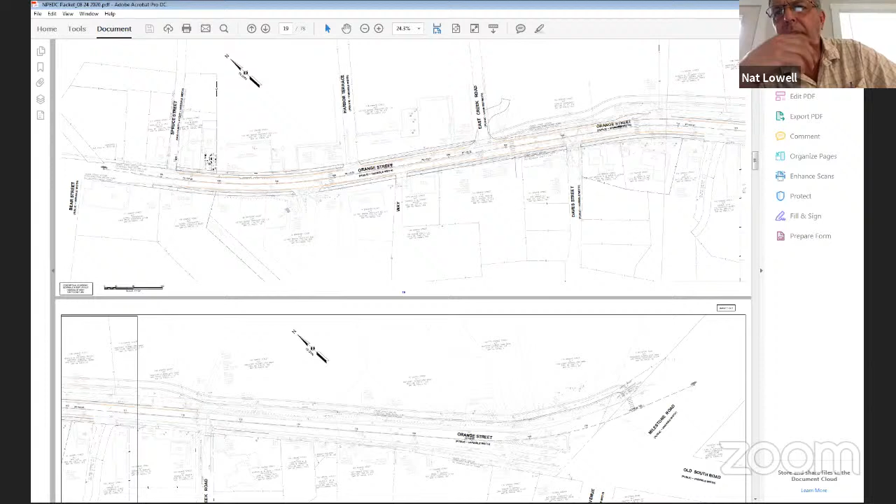I can't see anyone's hands right now, so does anyone have anything? Just speak up first. There we go, thank you Honor. Does anyone have any questions? I certainly have a couple, but I don't want to jump right in until someone else has any questions.

Mr. Chair? Yes, John, go ahead. I know a lot of thought and planning had gone into this, and I'm maybe a little late with an idea, but everything is tight there with the bike path, telephone poles, and Marine Home Center connections. Right now we have a sidewalk on one side, and most of the problems seem to be arising on the Marine Home Center side. I just wonder, was there thought to eliminating the sidewalk and pavement on the other side, we'll call it the Henry's Jr. side?

By eliminating the sidewalks down there and adding that space to the Marine Home Center side, that's really where we want that sidewalk to be, so we wouldn't be fitting two sidewalks on both sides of the street, but consolidating, using the extra space gained on the Henry's Jr. gas station side and allotting it toward the Marine side, so it connects to Goose Pond and all the way down. I just didn't know if that was a consideration.

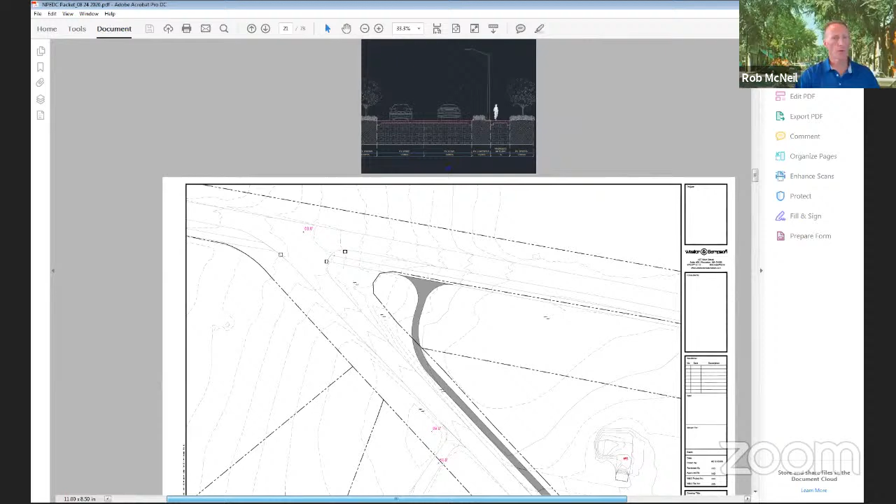So Tom Nevers bike path has certainly been on the agenda for some time for capital projects discussion. There's been a renewed interest in the past couple of years from the folks in Tom Nevers to really help prioritize this plan or this concept.

So we started working together with the most recent improvements along Milestone Road that are reflected in this, where the path actually goes up and meets the existing path. And that might still be adjusted.

There's some talk of doing sort of a rest area similar to the dedicated spot on Polpis Road, the one little bike path rest area that's dedicated to Mr. Young. Starting to develop more of those around town.

Some in this location here, seems like a helpful one, as well as down at the Milestone Rotary, sort of where all the bikes seem to come together before they disperse.

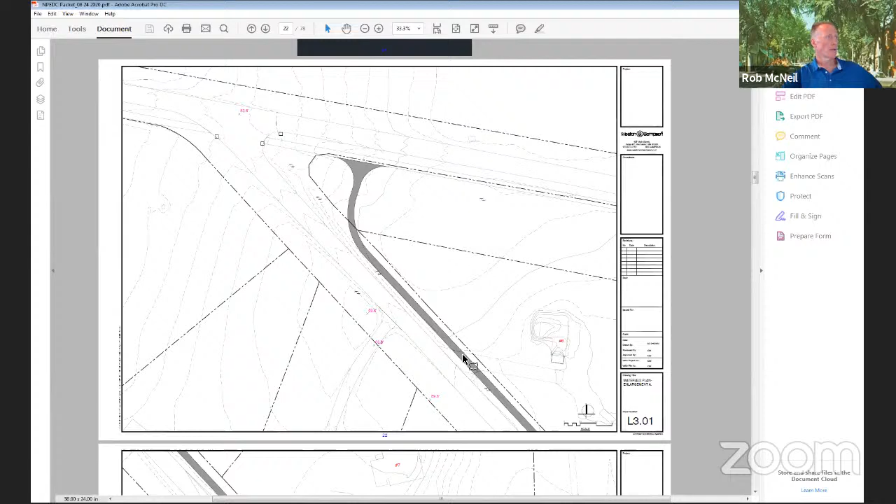So the path itself would essentially travel down the east side of the right-of-way, and that was chosen mostly because of the limited amount of driveway crossings and intersections. We're still working through some of the details with our consultant, but again, we're at still a very conceptual stage.

And this would tie down at the Tom Nevers Field into whatever configuration ultimately gets approved by the select board for future redevelopment of that.

And if folks are looking to find out what that might look like down at Tom Nevers Field, under the projects and developments on the town's website, there's the most recently published Parks and Rec master plan that was completed last fall and presented to the Parks and Rec Commission.

They have made a recommendation to the select board to move forward with the recommendations held in that plan, but that's yet to be presented to the select board due to COVID-19. So I hope that will move forward this coming fall.

In the meantime, we are advancing the concept here so that we can bring that to the Tom Nevers folks and ultimately back to select board for endorsement.

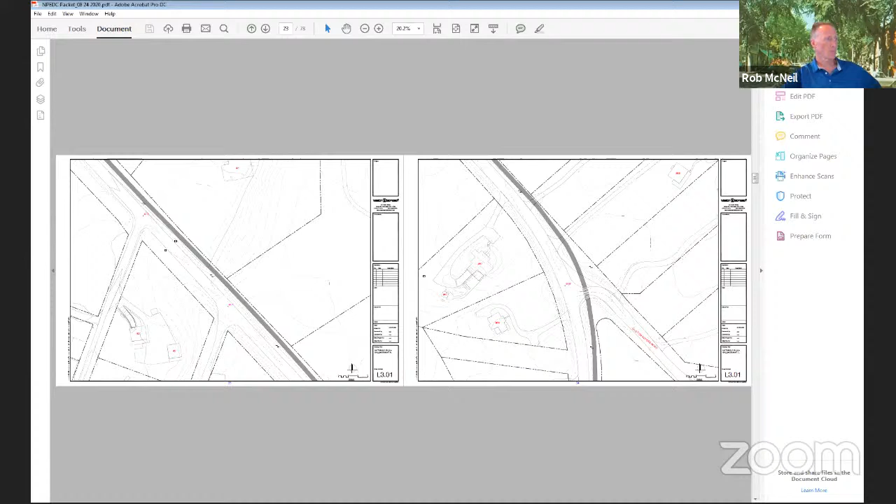Anyone have any questions for Rob or Andrew?

Just a comment to Rob. Bert Johnson. I've been president of the Property Owners Association out there for about 25 or 30 years now.

And the original developer showed a bike path on that east side of Tom Nevers Road. And he was supposed to have deeded that to the town, but the planning board at that time let him go and didn't realize that he hadn't given it to him. So we never got it.

But I've been trying to keep people from putting tennis courts and other things in the way of where that bike path was supposed to go. You should have a pretty easy trip down through there on that east side of the road.

Well, thank you for that. One of the things that we're also considering, I think that the commission should understand, is that there's a difference between designing and then maintaining and operating.

And as part of what I've inherited with the bike paths, just under 35 miles around the island, there's a combination of things going on here that sort of come into play when we contemplate the new ones.

And that mostly entails getting property right to make sure that we have adequate sight distance at intersections, and we have the right to go and maintain those sight triangles, so we can cut the vegetation back and make sure that the crossings are appropriate for bicycle and vehicular and pedestrian safety.

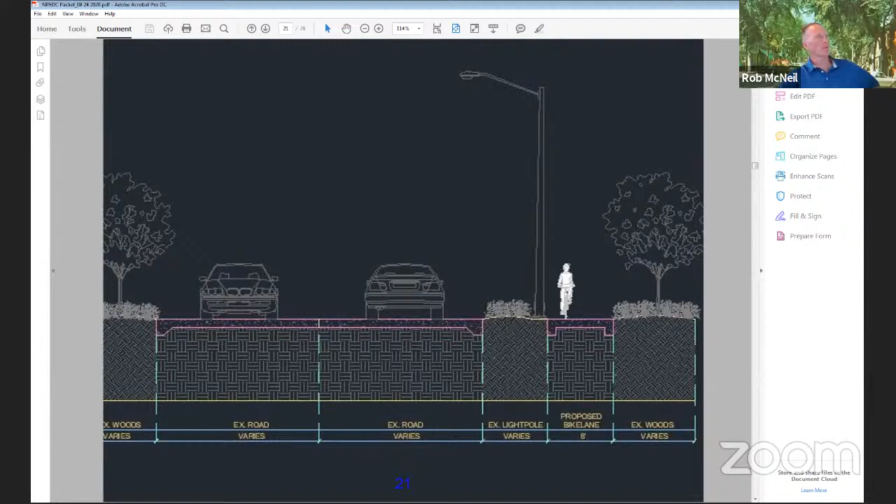Mr. Chair, the next project here we're conceptualizing is Sparks Avenue, Pleasant Street, and Williams Lane. Eleanor, you could probably go right down to the proposed work starting on, let's see, page 40. Okay.

So this basically builds off of the Four Corners concept roundabout. That's what you see pictured on the west side of the plan on the left. And so our designers have tied right into that. So Williams Lane, and this is still very conceptual, but Williams Lane, the intent of that update or upgrade will be to carry a sidewalk from the north side of Sparks Avenue all the way down to Pleasant Street. Sparks itself will have a multi-use path running along the entire south side, essentially.

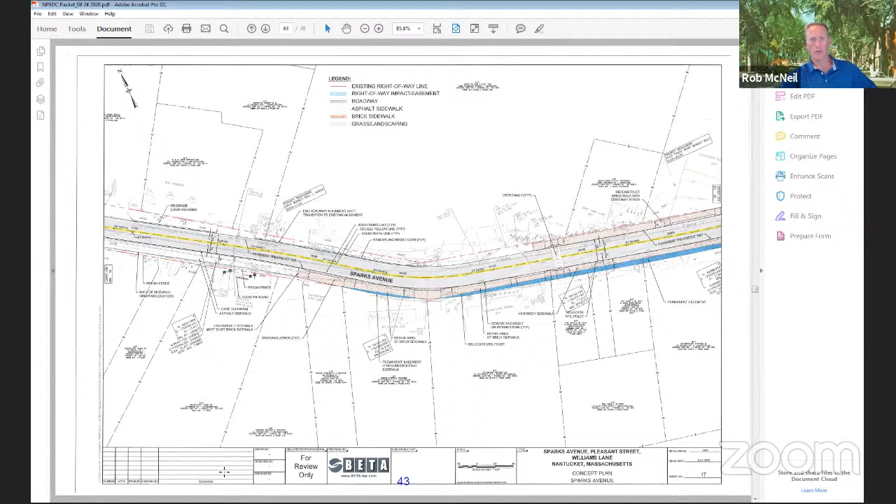Next slide. So continuing down Sparks, we would tie into essentially the existing sidewalk along the gas station across the front of the Cumberland Farms, and then continue on past the Stop and Shop. There's existing sidewalk there now. The south side would be widened to the 10 feet multi-use path and keep going.

And then we get down to the Sparks Roundabout. I want to do some things there, including a crosswalk to allow for loading, for the Downy Flake. Similar to downtown, some area for trucks that are providing services to area businesses to be able to load and unload. During busy traffic times, Sparks gets backed up with trucks just not having space to be able to go off the roadway into some of the area businesses. So where we can and where it's strategic to do so, we're taking a look at doing that.

Also, the sidewalk that currently comes around at the roundabout itself is quite narrow. You've probably seen a lot of people on bicycles using the sidewalks through this area. We've gotten lots of feedback from people using the crosswalks, telling us stories of getting stuck between the lanes, people not stopping for them, and the like. So one thing we're going to focus on through the roundabout is to really revisit these crosswalks. It's quite likely that we would be looking at doing raised crosswalks, both to continue to slow the traffic, to have people be forced to recognize and allow the bikes and pedestrians to utilize those crossings, and tie into just the whole idea of slowing the traffic so that it is able to cycle through and handle that volume.

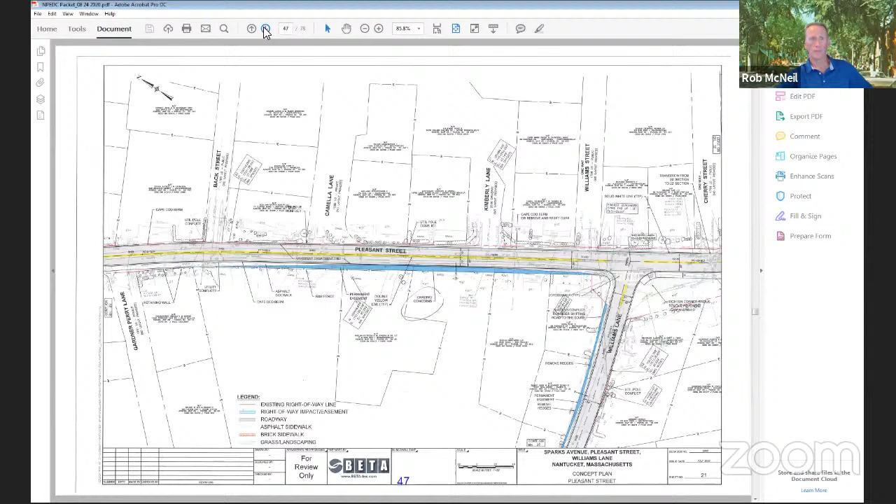As we've seen on some previous sheets, the blue highlighted areas show potential right-of-way impacts. This Pleasant Street proposal has 2 lanes of vehicular traffic, and shows a sidewalk on one side, the south side only, tying in with the proposed Williams Lane sidewalk that comes down. We'd be looking at flattening the curve, essentially teeing up the intersection at Williams at Pleasant, to continue the sidewalk and shorten up the crosswalk there to continue the pedestrian movements towards the center of town, to Mid-Island. Next sheet, please.

Continuing up, we start getting into some of the other cross streets and the backside of the Boys and Girls Club, taking a look at potential impacts depending on which way we can move. We have some pinch points, some physical in nature, like utility poles, and others environmental resources along Freedom Square. In the pharmacy area we have some wetlands. We have a number of other things to consider during this process, mostly subsurface utilities, so we'll look at any necessary upgrades to our existing water, sewer, and drainage. We also reach out to all of our private utilities, so communications and electric will be taking a look at these at the same time. Next sheet, please.

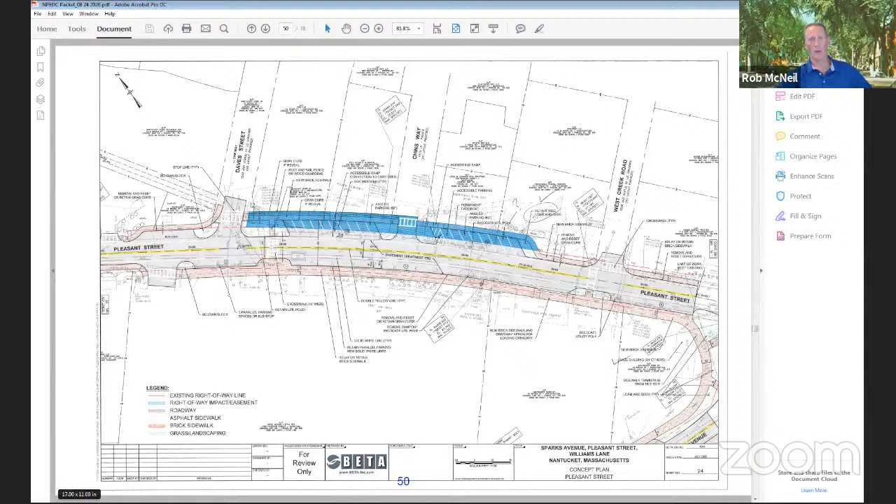That's based on a lot of excellent feedback from people who have helped me understand what goes on operationally in some of these really sensitive areas that tend to be impacted by traffic, particularly in the summer. Those lessons learned come from users going through here and seeing the different challenges, as well as public safety weighing in. We get a lot of good feedback through the traffic safety work group, as well as people from this commission and many others out in the public. There's just one simple fix to allow the free flow of traffic through here in the summer and minimize impacts based on some of these limitations that exist today.

Next sheet, please. This is just a highlight showing all of Williams. We're still looking at some of the potential impacts along Williams for us to be able to put in even the minimal width sidewalk. Next sheet.

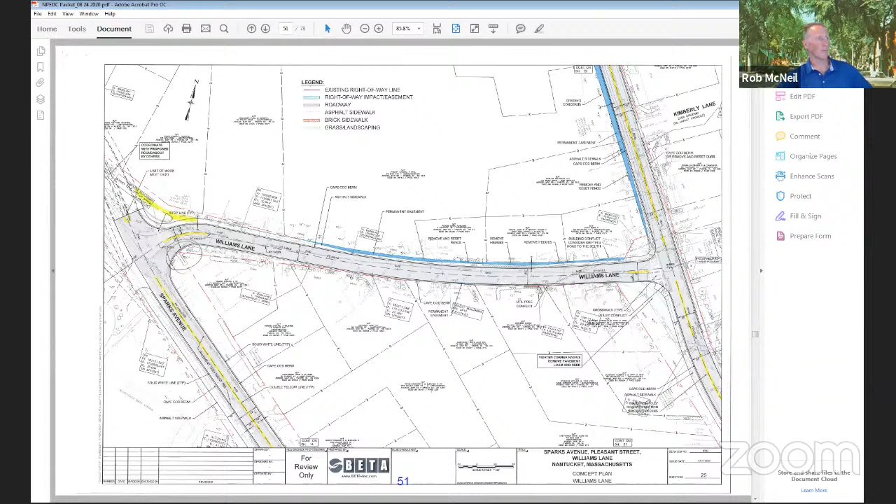Does anyone have anything for Rob real quick? These are all just concepts, everyone, just reminded of that. I'm just appreciative, Mr. Chairman, that Rob's come in to show us all this stuff. Exactly, I feel the same way.

Rob, I just have a quick point on that angle parking idea that's been bandied around for a while. I'd suggest Chins to West Creek is the easier spot, especially with that dead space by Lucky's or whatever we'll be calling it next. It's just cigarette butts and trash in there. From there to Chins, I don't know how many spaces you can get, but I'd bet 15 to 20.

Chicken Box owns that parking lot over there, as you know, especially now with COVID. Everybody in the world knows that they own it now, which they probably didn't know until COVID. I just don't know what the layout is in there. How far in do we go from the curb or edge of the Chicken Box lot to Pleasant Street? Do you know? Well, Andrew, go ahead.

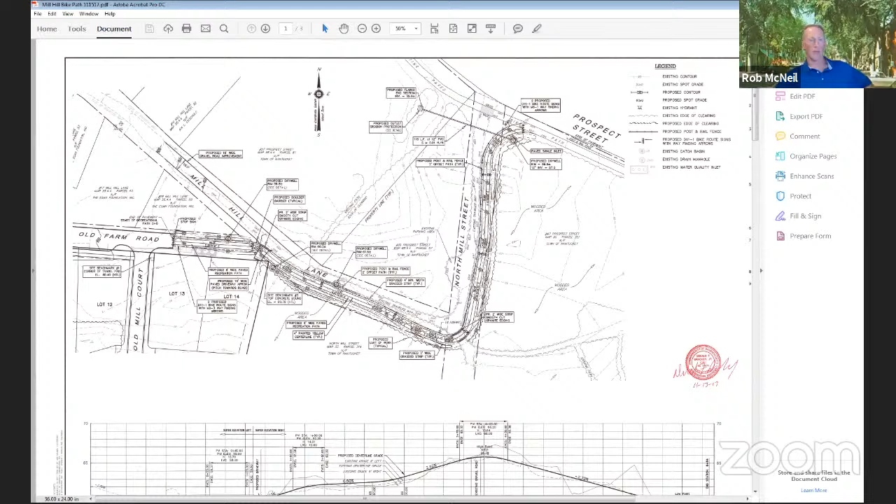We weren't comfortable putting anything forward these days that's not at least the minimum multi-use path width. This is off the surface, so the unpaved roadway is outside of that, except where it crosses at the intersection of Mill Hill Lane and North Mill, with a fence in between.

The only other thing I would suggest is the topography, which route is the least steep, whether it's phase 1 or option 1, option 2, or this one, which we'll call option 3 at the moment. That was another issue that's come up over the years.

Rob, way before you were here, when that multi-use path was put in and stopped at Stojack's property, there was a lot of negativity, path to nowhere comments in the paper. Well, that's because there was nowhere else to go, and if we didn't do it, we wouldn't have anything to this day at all. This is the worst spot on the island to figure out, worse than Orange Street, I can tell you that.

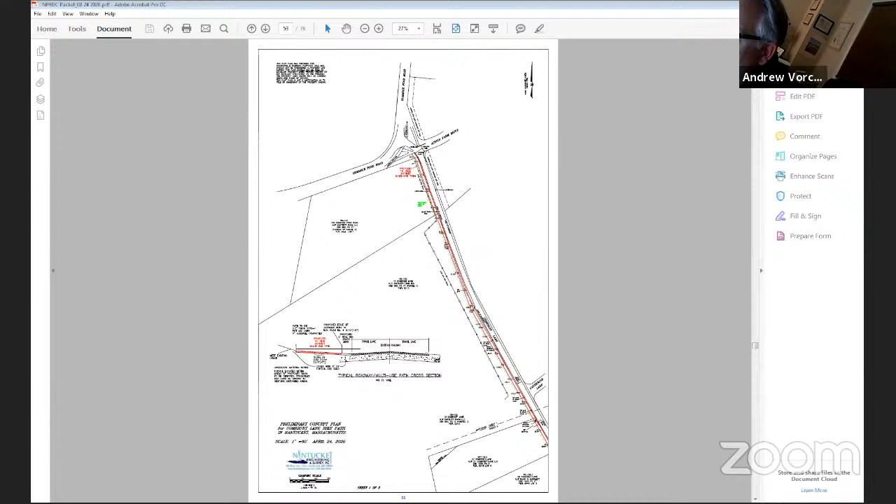So that's one issue. Eleanor, could we go to the next sheet, please? There was concern about some important trees along here, these white oak trees that are somewhat close to the edge of the road, and the idea is to move the path behind them and stay away from their particular canopy.

One thing that Rob and I have discussed is where the bike path and the road are really close to each other, it's hard to get a decent grass shoulder or have anything growing in there. So where the path is only 2 feet off the road, we're unlikely to have a grass shoulder, so it's going to have to be some different kind of treatment along there. Since we had some general support from all of the neighbors, I think we'd probably like to see if we could move it inboard a little into the properties. It would be within the front yard setback, so it's not impacting buildable area. That's where value comes in. And we've heard that there's quite a bit of support along here.

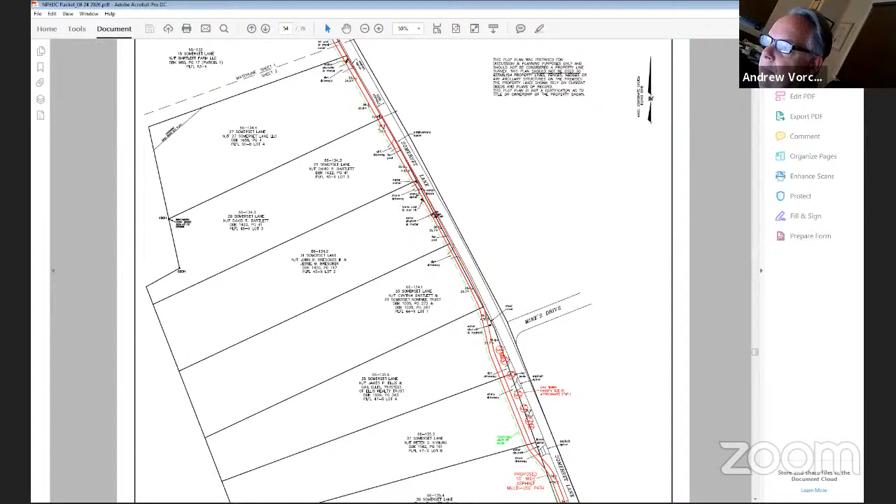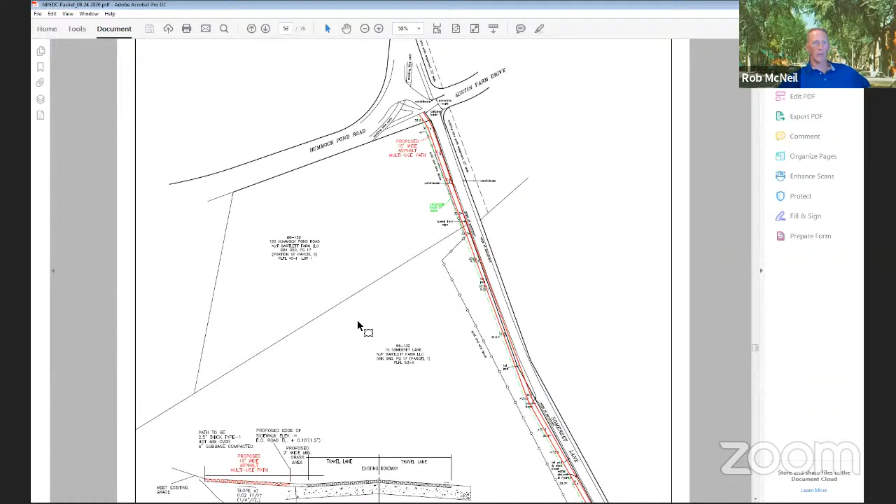Rob, anything you want to add on this one? Just that the commission should know that this is sort of a conceptual extension of what we're currently pursuing, and had worked with Mike before he left on, which is the Raceway to Somerset improvements, basically taking the bite off of the corner at Bartlett and Raceway. At the same time, keeping the Bartlett path to the south side of Raceway, so swapping sides, carrying it up to the Somerset intersection, and ultimately continuing it on the west side all the way up to Hummock Pond. So this is sort of an extension of that, and I applaud Andrew working with the person that was interested in supporting this. It's coming together, I think, pretty well. The design for the southern portion connecting to Bartlett Road is near complete, and hopefully this section here will be able to build on what we've been able to accomplish so far.

Hey Eleanor, how do I raise my hand? Oh, there he is. There you go, Bill. That's it, we can hear you. Exactly. I would like to, Mr. Chair, I would like to just add on to what Andrew said.

I would like to reinforce the support issue. All of the property owners along, I guess that would be the southwest side of Somerset Lane, are enthusiastically supportive of this, including the Bartlett family. The issue that we have with the restriction is a conversation that Emily Molden is having with the Bartletts right now to see if there's some type of workaround. But there's another side to that. My counsel feels that it's within the ability of the Land Council Board to grant this for public benefit and so on and so forth. But the board, I think, is very cautious about amending any existing restriction. So they're carefully navigating their way through, and I anticipate, or really hope, that we have a good outcome here. And in the event that we don't, maybe the town needs to consider some type of a taking.

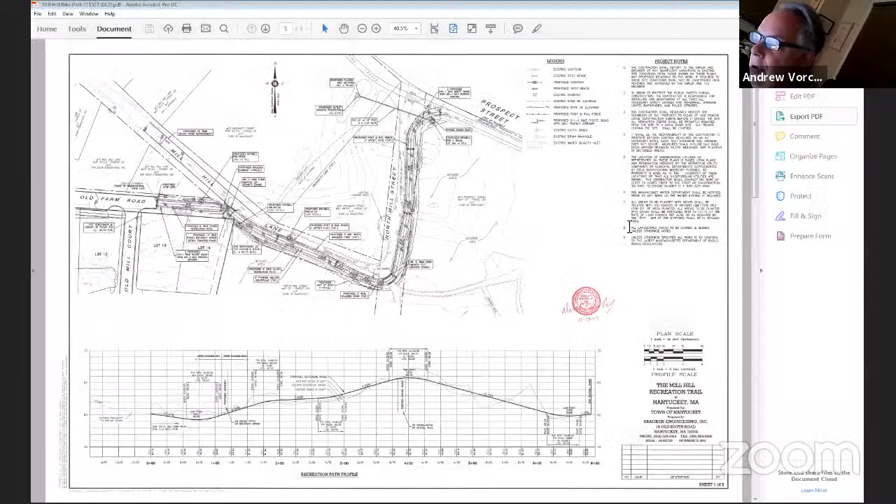I think, Andrew, this came up before Rob was here. It got closed off. I don't believe this is an actual laid-out road - I think it was one of those things that just sort of happened over the years. Jack, I don't think it's an actual road, is it? No, people traveled with vehicles for years. Yeah, I know, my father used to go up to Ernie's house that way too. It is a private road, not a public road. So that is a private road, Andrew, on the GIS or whatever - it is recorded. That came up when the planning board was looking at the subdivision next door, Old Farm Road. That's why we made that allowance for the bike path to go through.

The bike path could continue down Mill Hill, or within that Mill Hill layout. All of Mill Hill is also a private road, so we would have to do a taking through there to go down.

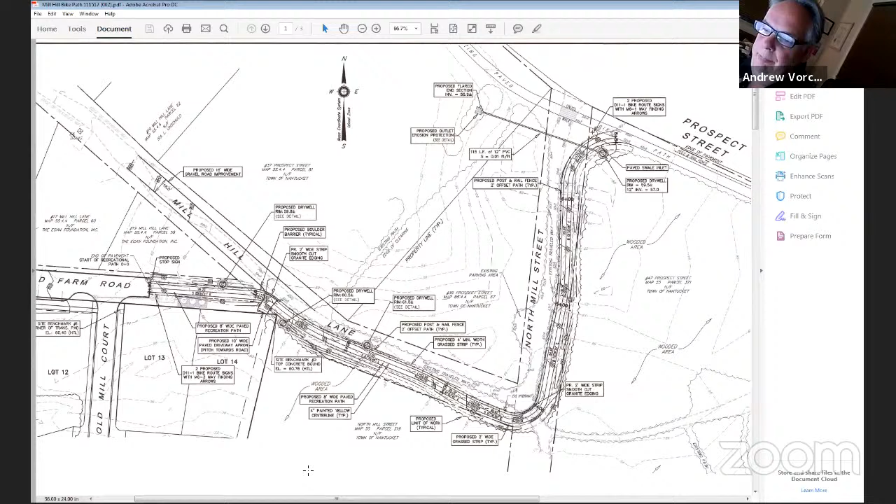I know Mike looked at it. I think it's a little bit steeper down there, very steep, and there's a lot of water that runs down the shell side and washes out into Prospect Street. Incredible amount of water runs down there, Jack, when it rains hard. That's what I meant.

All right, I didn't mean to open up a can of worms, Billy. That's all right. There's also a cut through on Cato that goes right up to Chicken Hill. I think that's been abandoned, and part of the agreement was to never open that up, Andrew, wasn't it? Part of this?

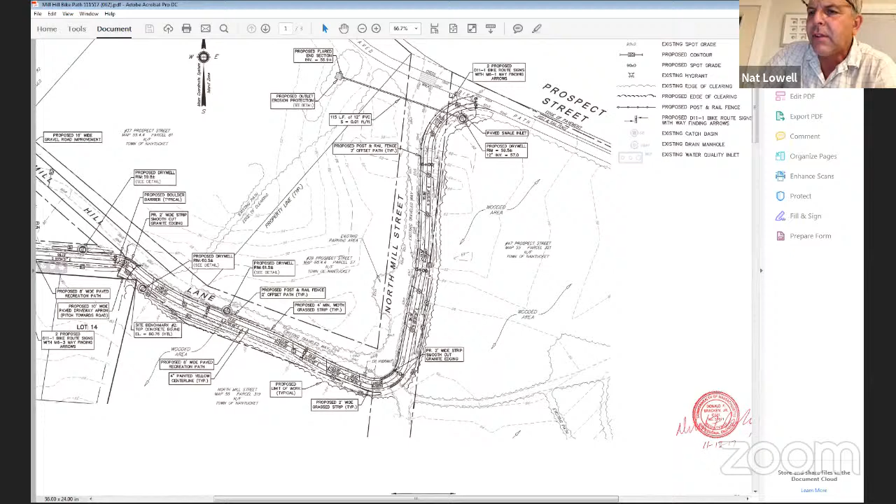Cato, he's talking about that section of Cato that went up behind. Yeah, I ride through there, there's a path. That's all private roads, the sewer line runs under there. It's not open for vehicles, but it's open. You can bike through there and walk.

There you go, Andrew, or Eleanor, or whoever did that. The one I'm talking about runs parallel, kind of along the left-hand side of the Woodland Hills subdivision.

But I mean, well, it doesn't matter, it's not viable. No, I think so we don't... Billy got us back to the previous discussion.

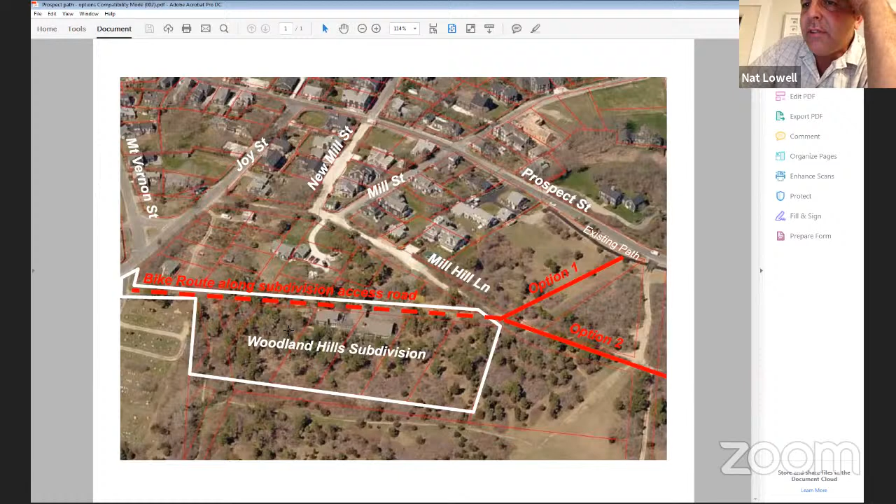Prospect Street, the dangerous part of Prospect Street needs to be improved no matter what we ever do with this nightmare here, because every bicycle is not going to go this way. Even if you offered water and cookies somewhere else, they're still not going to go that way, they're going to go wherever they want. I think it's more of a safety route to Nantucket Road than it is a bike route, it's more about improving the safety to get there.

So that's really how it's sort of transpired over the last 16, 17 years trying to figure this out. I think what you need to do down through there, from where the bike path ends down to Milk Street, is put a painted bike lane, so that people, when they're driving, at least know they're driving on a bike lane.

Well, my thought was, now that you brought that up, Jack, is adding more of those sharing stencils, because anybody passing a bicycle on Prospect Street shouldn't lose their driver's license for a while. I mean, it's ridiculous, there's no need to pass a bicycle on some of these roads, but it's very dangerous. I wouldn't want my kid driving down there on a bike, I'll tell you that.

At least have to go by Joy Street for these big trucks, because the big trucks go along there all the time. Yeah, well that's exactly, there's curbs that stick out, lawnmower trailers hit that curb every so often at the bottom of Mill, coming from up above there. So there's a whole bunch of different problems here.